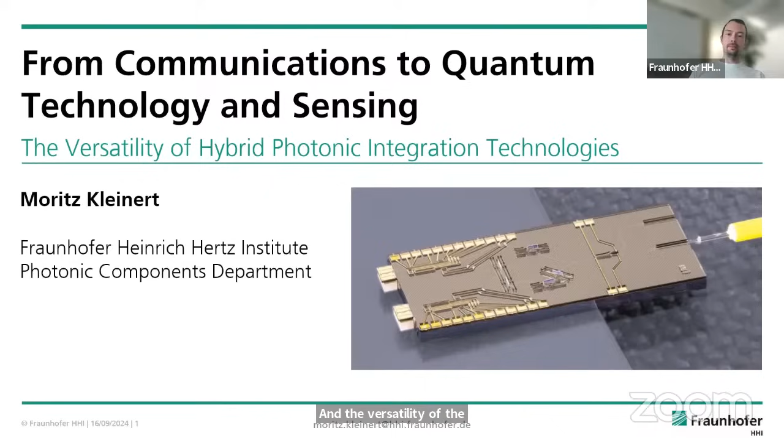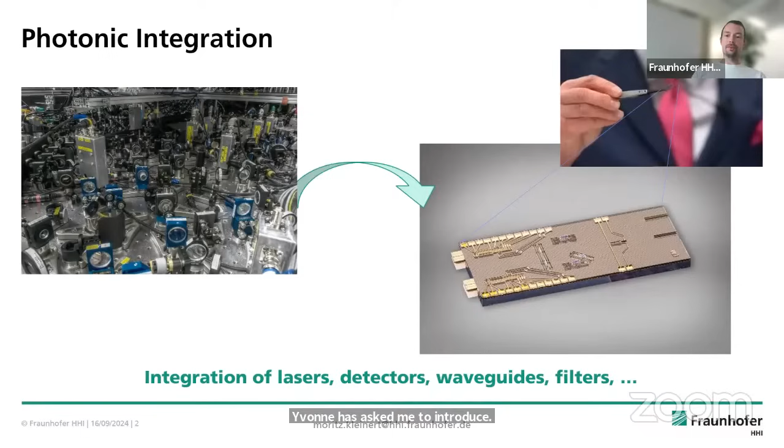Thank you very much for the kind introduction. Pleasure to be here with you today to talk a bit about our activities in hybrid photonic integration and the versatility of hybrid photonic integration technologies for various applications. As I'm the first speaker of today, Yvonne has asked me to introduce some aspects of photonic integration, hybrid photonic integration, to get everybody here in the workshop up to speed on what we are talking about. That's why I just added two slides to my talk today.

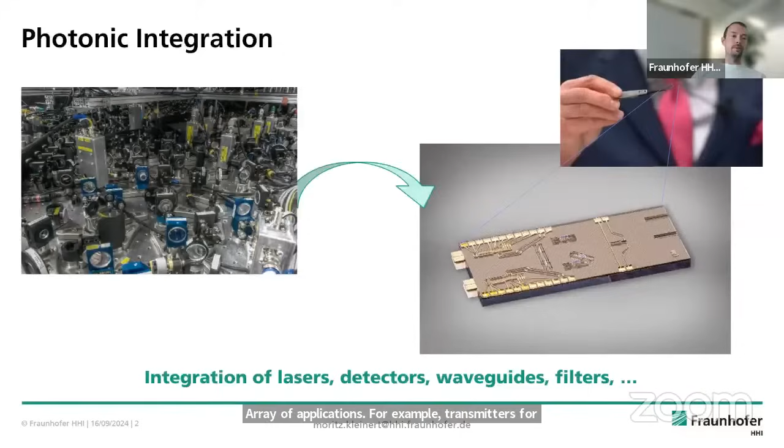I'm sure everyone is aware that in photonic integration, we want to integrate lots of optical functionalities from bulk optics into miniaturized chips. For example, lasers, detectors, waveguides, filters, in order to provide multi-purpose photonic integration platforms that can cater for a broad array of applications. For example, transmitters for communications, readout units for sensors, photon sources for quantum technologies, and the like.

There are several integration techniques that are being employed. One, of course, is monolithic integration, where the actives and the waveguides are on the same die. Everything has to be fabricated in a semiconductor material system, mostly indium phosphide, because it has a band gap that is suitable for near-infrared light emission and detection. One great advantage is that once you have fabricated your chip, you have your optical subassembly, so you do not need to do any assembly at this stage, just some module packaging, fiber coupling, that's it.

However, you're intrinsically limited by the properties of the material. For example, if you want to go to shorter wavelengths, say to fabricate a laser that emits in the visible, a tunable laser, then this material would be out of question. So if you want to go to other wavelength regions using a monolithic integration approach, you have to do all the development all over again.

And the second thing you need to take into account in monolithic integration is that even though you might be able to fabricate, for example, lasers, detectors, modulators, and waveguides on a single chip, there usually are some trade-offs in the manufacturing between all these different components. So usually the specifications you get from these elements on a monolithically integrated circuit are not as high as you would get from components fabricated on dedicated wafer runs - for example, dedicated lasers, dedicated modulators, dedicated detectors.

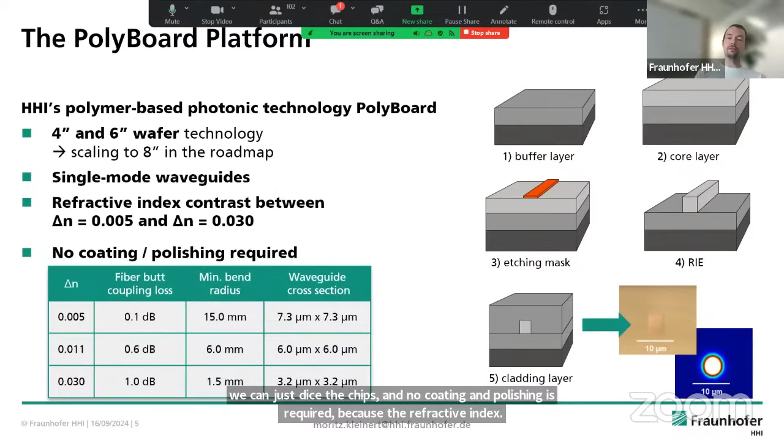A quick overview of the waveguiding layer: it's based on polymer materials that are commercially available, fabricated on 4-inch and 6-inch wafer scale, with scaling to 8-inch on the roadmap. We use single mode waveguides with rather low refractive index contrast, and we can just dice the chips—no coating and polishing is required because the refractive index of the waveguides is quite close to that of standard single mode fibers.

Here's one example of hybrid integrated functionality on these chips: a tunable laser, where we have an indium phosphide element that is HR coated on the backside and anti-reflective coated on the coupling interface, butt coupled to a polymer-based chip with a waveguide where we have an inscribed Bragg grating. This Bragg grating acts as the second mirror for the laser cavity, and it's tunable by means of thermo-optical tuning.

In this way, we were able to realize tunable C-band lasers, but the same approach can be used for shorter wavelength—this is one of the beauties of the hybrid integration concept. We leave everything as is, adapt the parameters a bit, exchange the gain chip, and in this way realize tunable lasers for 1064 nanometers and 785 nanometers using other gain elements. These lasers are building blocks used to fabricate more complex photonic integrated circuits, for sensing, communications, and quantum technologies.

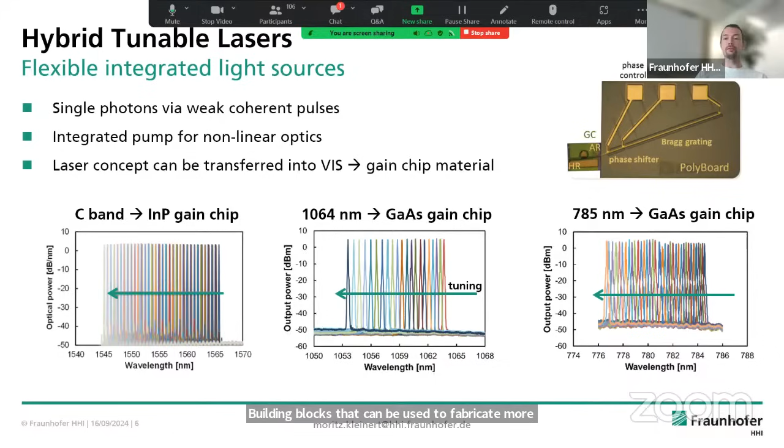One other functionality I briefly want to introduce is the use of thin film elements. Despite having optical filtering functionality that is waveguide integrated, as usual in photonic integration, we also have the possibility to use these thin film elements—basically very thin dielectric layer stacks, as known from classical optics, where you have coated lenses, dichroic mirrors, and the like.

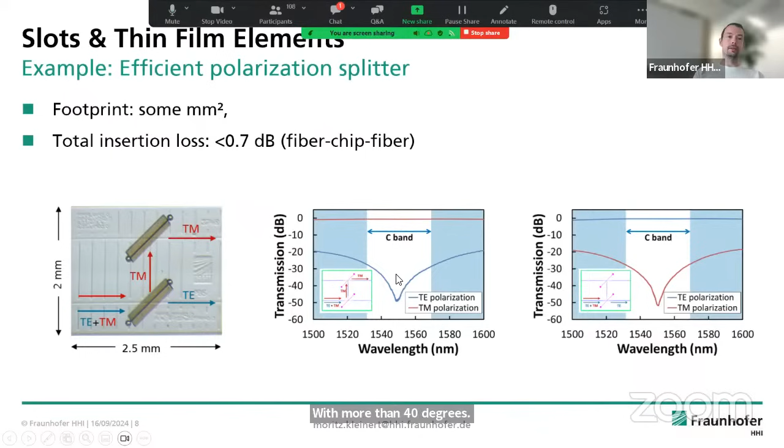In this way, we're able to transfer efficient filter characteristics from free space into integrated optics on a small footprint and in a temperature-insensitive manner. Here's one example: a polarization beam splitter that is quite effective with more than 40 dB of polarization extinction ratio and low insertion loss of below 0.7 dB from fiber to fiber.

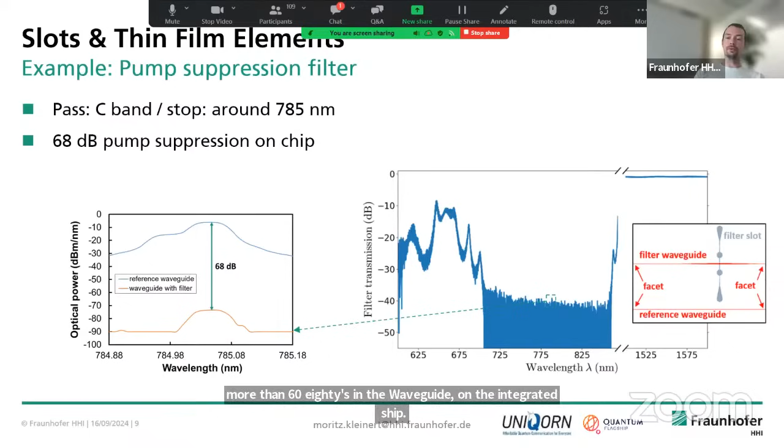Here's one example from quantum technologies, where we have a filter that suppresses the pump light by more than 68 dB in the waveguide on the integrated chip, which is very important for the generation of single photons and photon pairs.

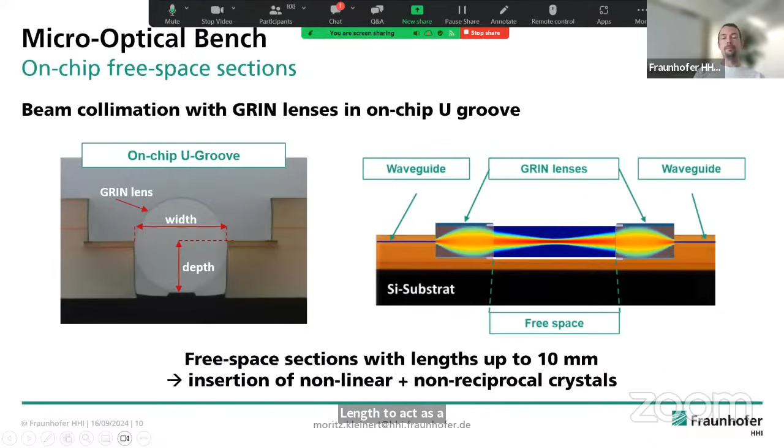A third building block we use extensively is our micro-optical elements, where we have graded index lenses—short pieces of graded index fiber polished to an exact length to act as collimating or focusing lenses—inserted into the PIC itself to realize free space sections on the chip, where we can insert basically whatever we like. For example, isolators, as here, with lower than 1 dB on-chip loss in forward transmission and more than 40 dB peak isolation.

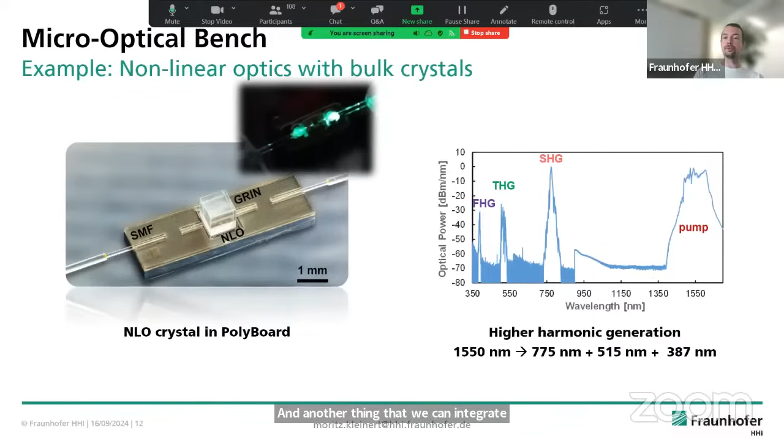Another thing we can integrate using this approach are periodically poled crystals for nonlinear optics. With this, I'll now move on to some examples that I want to show you today.

One example here from communications is a photonic engine for transceivers. This is part of the TERIPHIC EU project, where we have waveguide gratings as multiplexer and demultiplexer functional building blocks on the chip. These are used to couple arrays of externally modulated lasers and waveguide photodiodes to realize transceivers for next-generation data centers. One example with 8-channel photodetectors and 8-channel EML arrays demonstrates 800 gigabit per second capability. In the next step, we realized a 16-channel transceiver using the same building blocks developed for the smaller versions, using a bigger PolyBoard chip.

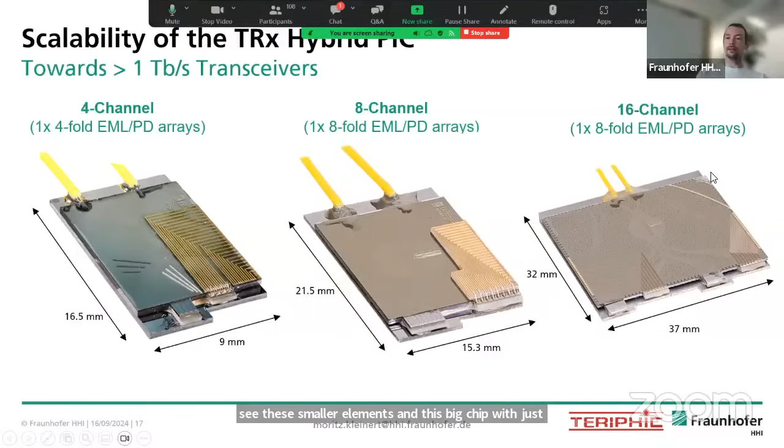This is also one great advantage of the hybrid photonic integration technique: you can have the active elements where you need them. Here you see small arrays of active elements and this big chip with just passive waveguides, which gives a great cost advantage compared to monolithic integration for these kinds of applications.

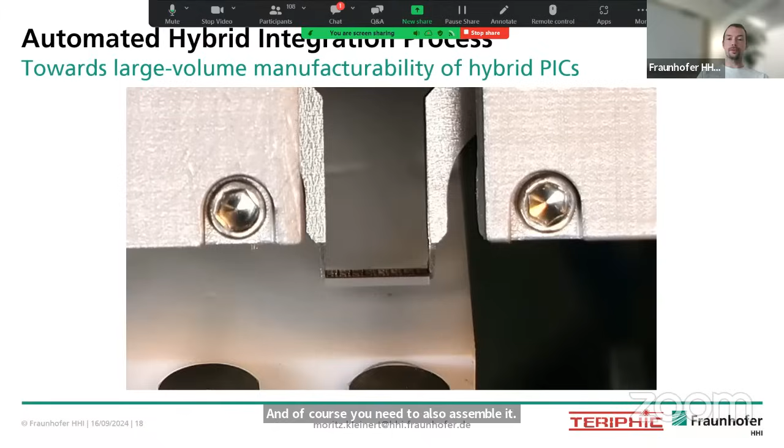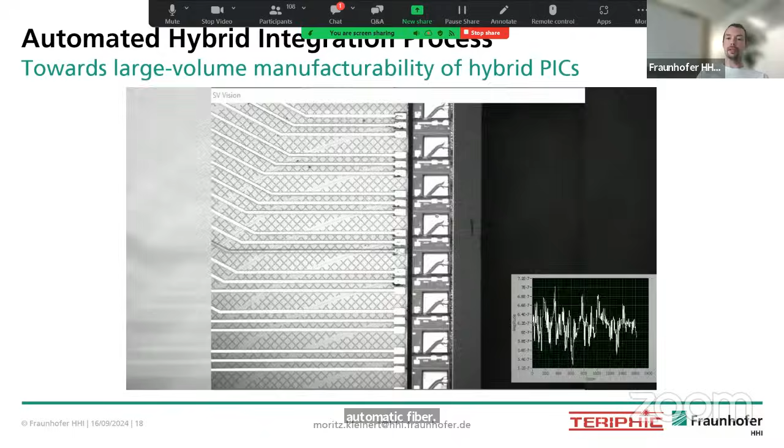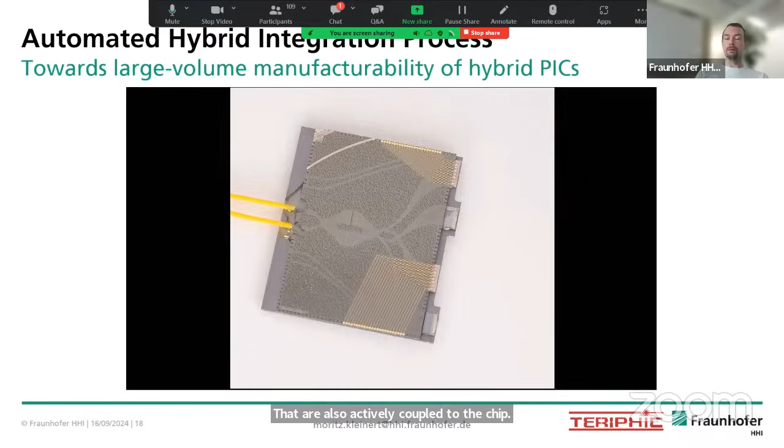And of course, you need to also assemble it. This is something we are automating together with partners, in this case Ficontec, where we have automatic contacting of the arrays, automatic fiber insertion into the chip, and active alignment of the EMLs. The same is done for the photodiode arrays, which are also actively coupled to the chip, cured, and then you have the optical subassembly. This is an important thing to always take into account in hybrid photonic integration.

Another example from a European project, TeraWay, for terahertz communications. This is a hybrid photonic integrated chip that generates terahertz radiation, for example for 6G networks. Here again we have tunable lasers that are introduced, an optical isolator on the chip — a quite unique functionality — a modulator PIC from indium phosphide, an antenna PIC from indium phosphide, and finally a TriPleX PIC from silicon nitride from LioniX.

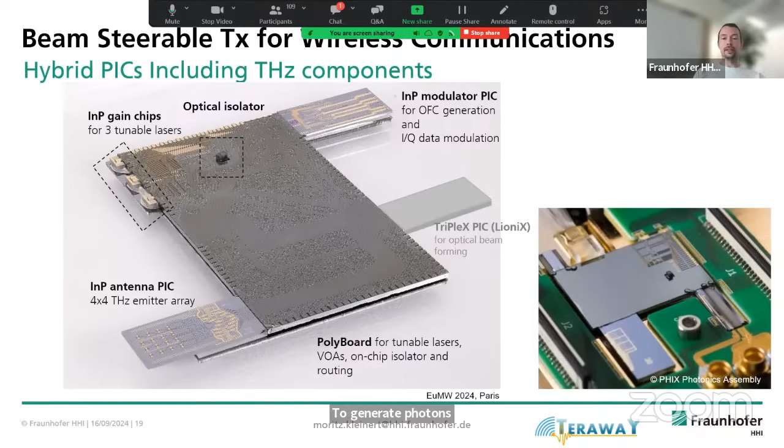Even though you see various indium phosphide PICs here, these are all optimized for their respective functionality. The modulators are optimized for modulation, the antennas and photodiodes are optimized for their functionality, and the gain chips are optimized to generate photons. So again, this underscores the advantage of hybrid photonic integration for these kinds of very complex integrations.

One last example here from quantum technologies. Here we make use of the micro-optical bench, where we insert a quite large periodically poled KTP crystal that generates photon pairs from an input of 775 nanometers, generating photon pairs at 1550 nanometers with orthogonal polarization that are split by the polarizing beam splitter introduced earlier.

The pump light is suppressed by the thin film element with more than 60 dB suppression on the chip. We can indeed demonstrate photon pair generation using this approach in a hybrid photonic integrated way, and these photon pairs are then available for more complex processing in the waveguide on photonic integrated circuits.

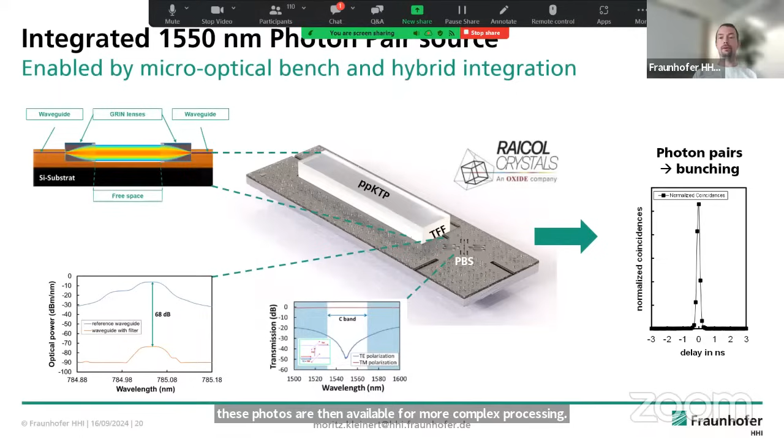With this, I'm already at the end of my talk, and I'm looking forward to your questions.

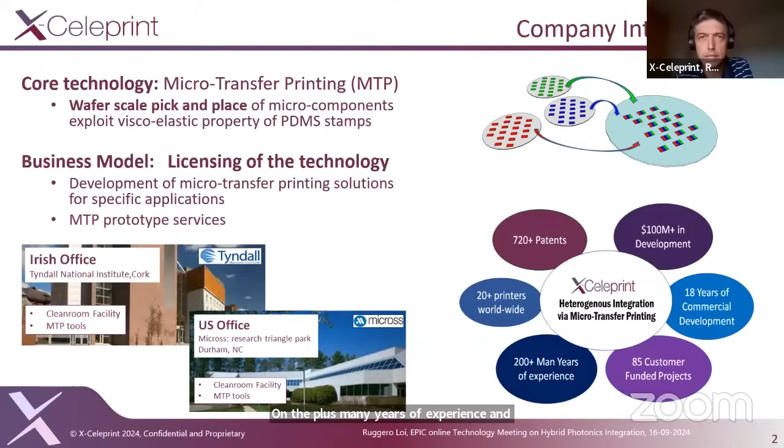In terms of numbers about X-Celeprint: we have 720 plus patents, 100 million plus in development, 18 years of commercial development, 85 customer funded projects, 200 plus man-years of experience, and 20 plus printers worldwide. This number is actually doubling in the last 6-12 months.

As we've had many requests, especially in Europe and from new RTOs and companies interested in developing new solutions on MTP, in terms of projects we are directly involved in a number of EU projects, for example Inspire, Ambrosia, Baman, and M-Engine, and we've been involved in a successfully closed project in the past. There is also a good number of projects that we support from the back but are not directly involved in. This shows how the ecosystem of partners working on MTP is able to work on their own on the technology and to develop new solutions.

This also shows how the maturity of the technology is increasing. We're also collaborating with pilot lines, and there are a number of EU pilot lines adopting MTP as a standard technology in their offer.

In particular, we recently have the Photonics Fab, which is actually building a small supply chain for indium phosphide integration on silicon nitride, and potentially on SOI, through microtransfer printing. There is also a number of projects with industry, usually about 20, between new projects coming in and projects closing.

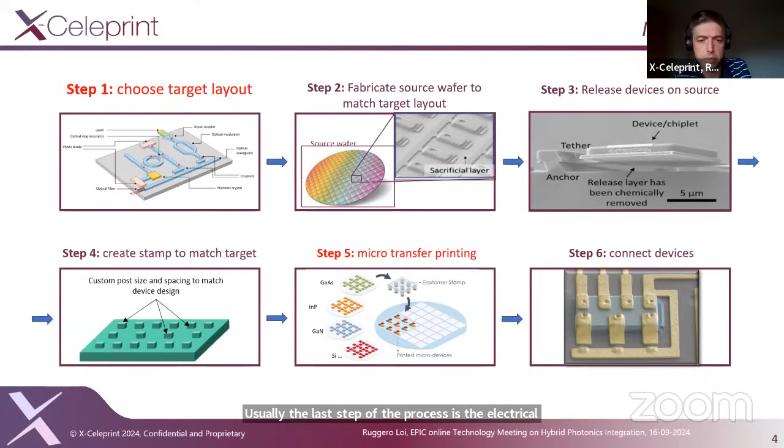In this way, we can mix and match different materials and device thicknesses on the same platform. In particular, we can integrate many components in parallel, increasing throughput and making the technology particularly suitable for high volume heterogeneous integration. Usually the last step of the process is the electrical interconnection, while optical interconnection is achieved by passive alignment through alignment marks and pattern recognition.

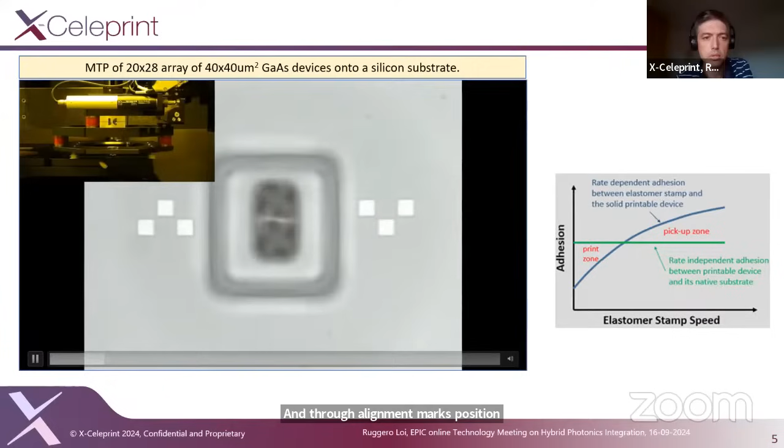So here I just wanted to give you a visual example of the technology. Here we have a source wafer where we pick up two coupons, part of a larger array. Through alignment marks positioned on the target and on the coupons, the pattern recognition calculates the correct alignment, and then we go down with this transparent stamp made of PDMS, and we're able to release the coupons on the target.

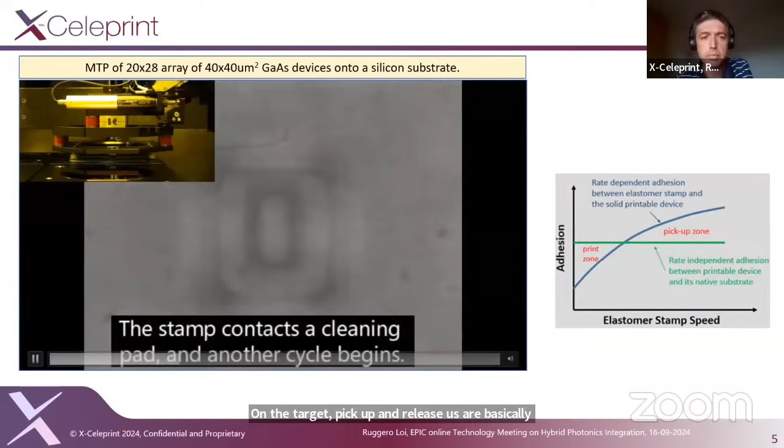Pick up and release are basically dependent on the speed of the stamp, that is, the speed at which the stamp is peeled off the substrate. At high speed, we're able to generate strong adhesion to the coupon and pick it up, and by peeling off the stamp slowly, we're able to release it onto the target substrate.

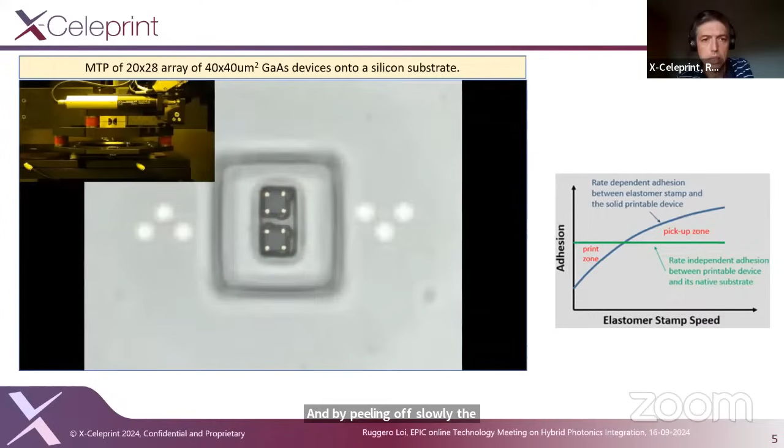So why use microtransfer printing for integrated photonics? What are the main features and benefits? For the starting wafer, we can accommodate, usually, a III-V material, which is pretty expensive. We can accommodate a highly dense array of components, increasing the source wafer exploitation. We can also fabricate the devices completely before transfer, which allows for known good die.

But it's also possible to integrate coupons of material and then post-process them on the target wafer. In terms of transfer, as I said, the technology allows parallel integration of many devices, and we can also mix and match different materials and stacks, giving the technology high throughput and flexibility.

In terms of printing, we work with passive alignment. We can reach below 0.5 micron, and we're already working on a strategy to reach 0.1 micron alignment, so 100 nanometers. We've already demonstrated that for a single post and small arrays, but it's still at R&D level. This technology is not used in production yet.

So in terms of microtransfer printing integration of photonic devices over substrate, we've done that for operational devices, or just material, single post or arrays. The types of substrate where we integrated these III-V or other components are silicon, silicon dioxide, glass, gallium arsenide, indium phosphide, also SOI, silicon nitride on insulator, as well as thin film lithium niobate.

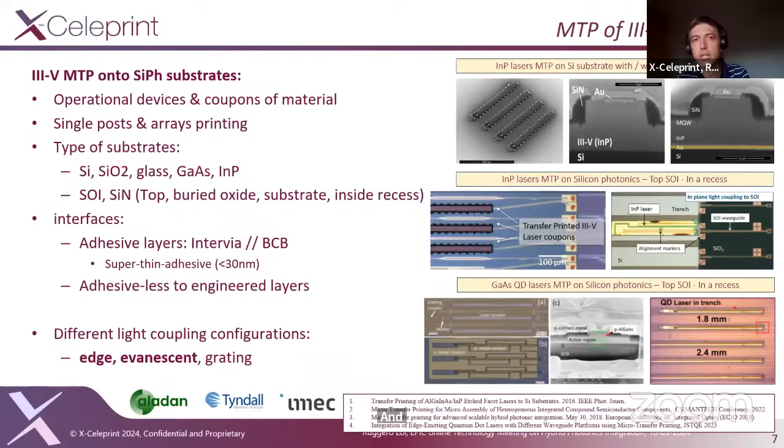So you can have an edge coupled laser on chip. I'll show you an example now. Here we have a laser, indium phosphide, integrated in a recess, butt coupled to a polymer waveguide, and then evanescent transfer the light to an SOI. Here you can see the laser light up and the light coming out of the SOI waveguide at the other end.

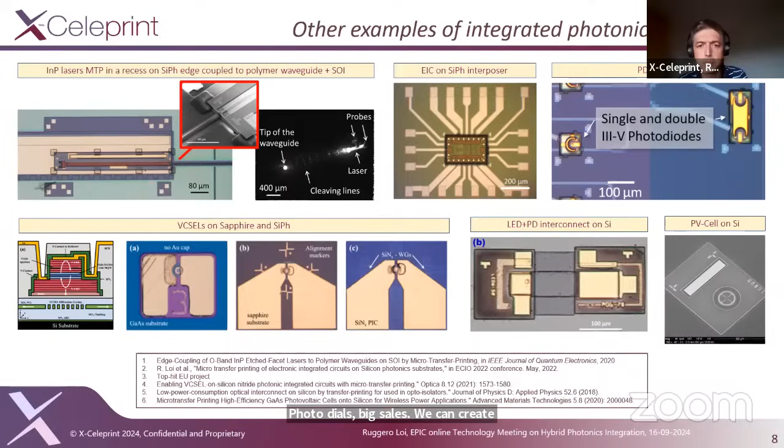We also show that we can integrate electronic integrated circuits, photodiodes, PV cells. We can create interconnects with LEDs, PDs, and polymer waveguides. We integrated PV cells.

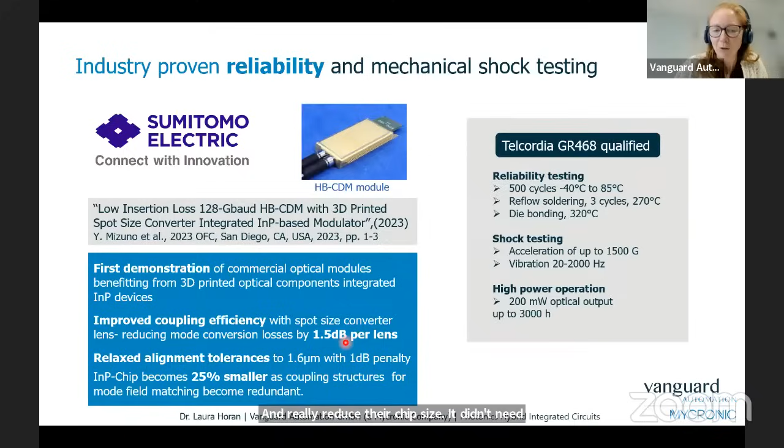And where Sumitomo saw the benefit here is to improve coupling efficiency, where they're able to reduce their losses by 1.5 dB per lens, pretty significant. Also relax their alignment tolerances up to 1.6 microns, and really reduce their chip size. They didn't need the spot size converters anymore on chip. They could use the 3D printed lenses for this and make their chips 25% smaller.

So we have a path to implement photonic integration with 3D lithography for customers and partners. And we do this slowly to really implement the technology into industry. So the first step, we recommend that the industry keeps their standard production process steps and simply adds 3D printed elements with active alignment into their photonic products. And the idea here is to prove coupling and yields, but also to prove the components for all different testing and requirements that the customer might have.

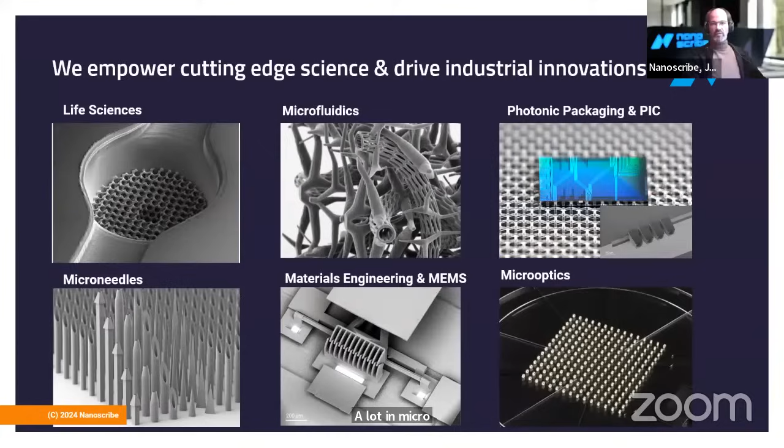A little bit of overview - beyond this, what we are doing here is we have these kinds of printing technologies used for life science, microfluidics, microneedles, material engineering. We see some MEMS devices here, a lot in micro optics, and what we talk about today is photonic packaging and photonic integrated circuits. I will explain this a little bit more, where we are placed there.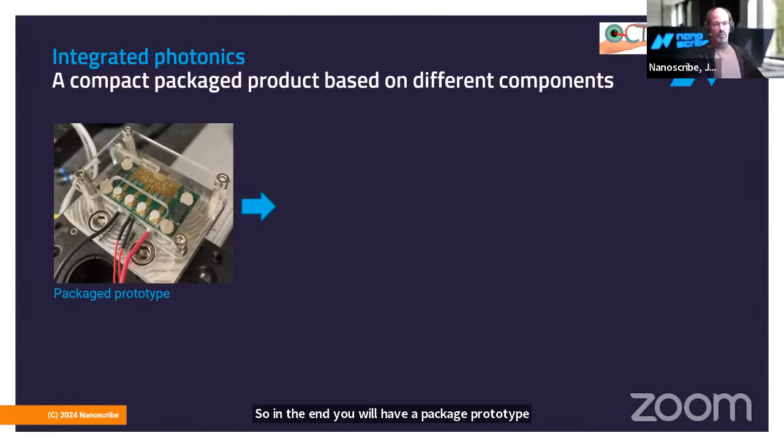Integrated photonics, as already explained by a couple of previous speakers, Moritz from HHI for example, is a product based on different components, and you need to mix and match different mode fields and diameters. In the end, you will have a packaged prototype, like we have here from the handheld OCT project, where you have the die - let me put on the laser pointer - where you have the PIC here on top, a fiber connector, and then we have printed here, as you can see on that side, some optical lenses in order to do free space coupling in this case.

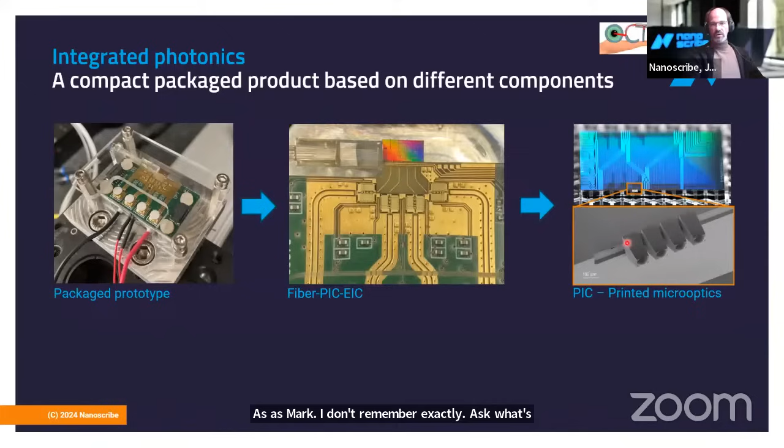So it's not fiber coupling, it's free space, as it is for OCT systems. We printed precisely aligned optical elements to the waveguide, with a detection precision of 100 to 200 nanometers, precisely aligned to the waveguide. This basically means we can print on any material - silicon nitride, silicon on insulator, any component, the PIC itself, a laser, a VCSEL, a photodiode, single mode, multi-mode, polymer, polarization maintaining fiber. It can be 2 seconds, but that depends on the optical design of the lens we print or the connection.

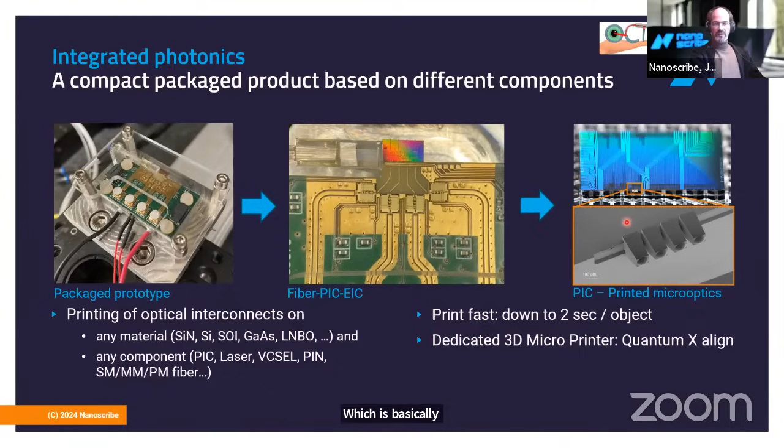For this, we have developed the micro 3D printer Quantum X align, which is basically a printing product where we also have resins and other accessories developed in-house by us. This is always a supporting patent for the portfolio.

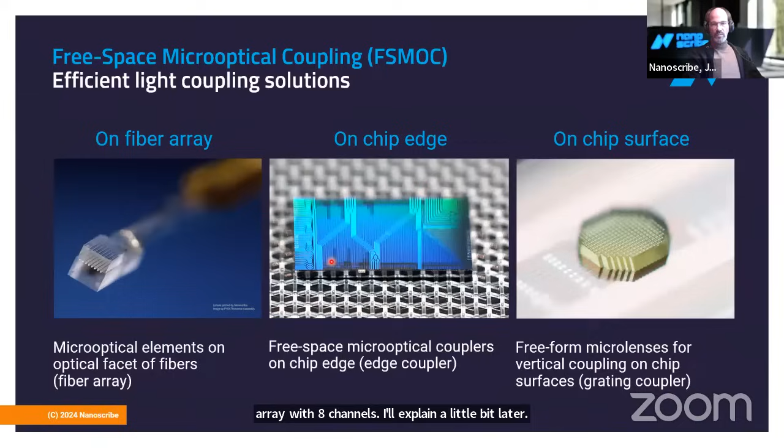So coming now to what this means for you: we can provide efficient light coupling solutions on fiber arrays. On the left side, you see a fiber array with 8 channels. This can be on the chip edge, as I've shown previously, or it can also be on the chip surface, replacing grating couplers.

So fiber arrays, what do we do there? We adapt the mode field diameter and the numerical aperture of the fiber array, which is 3 micron to 10 micron size, and we have to adapt, as Laura showed, to the small diameters on the waveguide, for example.

In this, we have a very easy software, Nanoprint X, where we define the lenses via a formula. You can see on the upper area, or you can just have the object you want to print, the micro lens or anything else, and load it into the software.

We mark the alignment feature you need. In this case, for fiber, we align to the core with less than 500 nanometer precision. You select process parameters - there's a ready-made set for every requirement in the system already available in the software.

Then you just print and develop. We use a honey-like resin - you just drop it on the fiber and then we can print. I'll not show this, but you're welcome to contact me and we can set up a demo, and I can show you online or on site in Karlsruhe if you want to.

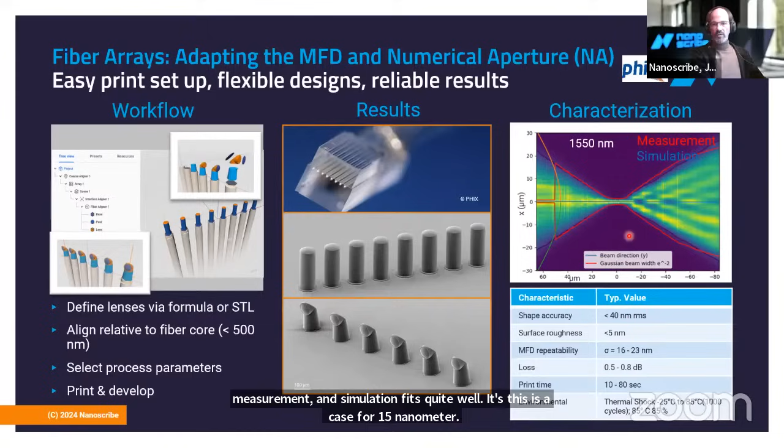As usual, we also have proof for environmental conditions, thermal shock, or humidity testing. That's all standard. Some images now to show the flexibility.

So here you can see on fiber printing, periscopes. This can be multiple lenses, a lens set here, or the taper for the butt coupling, things like that. Periscope array - this is a design by Printoptix.

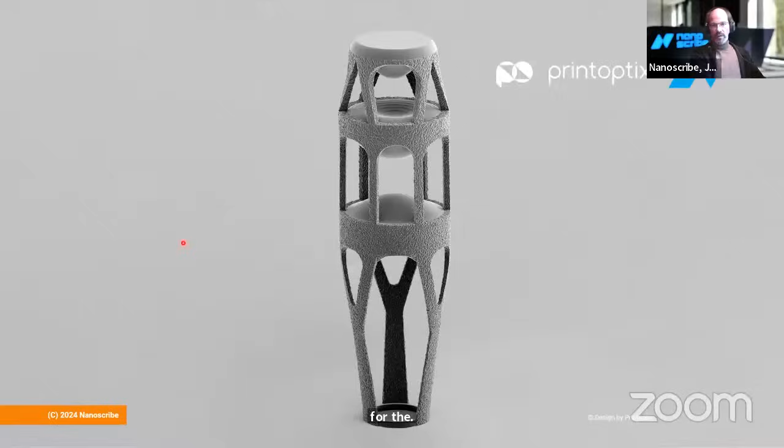We don't only print on normal fiber arrays, but we can also print on endoscopes or multi-core fiber bundles, anything you can imagine. And this is a multiple imaging lens.

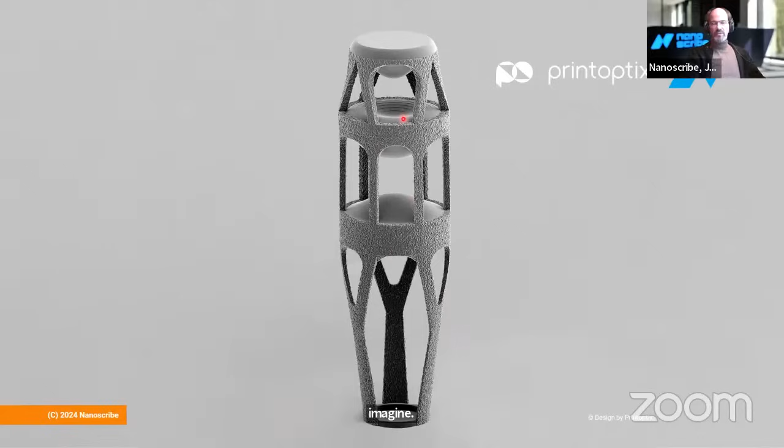So it's a little bit different than beam shaping. This is really imaging, giving an image back. So the quality of the resin is highly important.

You can see also that we can nicely shape even the surfaces on the side to have some kind of structured surface to avoid stray light, with our proprietary processes.

An image of coupling of lenses - you can see how nicely they are aligned. That was an in-house result print test.

On the edge of a chip, what we do basically is shaping the beam from elliptical to round, to couple to a fiber, or maybe to another PIC.

So again, in the software, you define the lenses, again with the formula or STL. In this case, you align relative to marker, so down to 100 nanometer precision is possible, depending on the design and on the printing speed also.

And then you also need to align to the edge, and make sure that you can print precisely at the edge to avoid some shadowing effects. Then standard process parameters: print and develop.

In the middle, you can see some results. These lenses I have shown already previously. And then here are some multiple lenses, a few minutes of print time for these lenses.

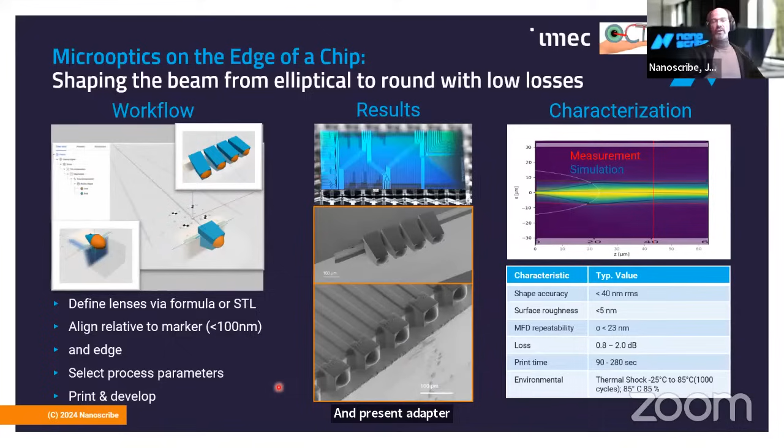Print time here is a little bit higher, so it's 90 to 280 seconds. It can be more - it really depends on your optical interface, and there we need to discuss. If you want to have on the chip basically a 1 micron, 2 micron, 3 micron mode field diameter, we then print the lenses adapted to this with our system, or rather our partners do this for you.

This is again from handheld OCT, an image of the chip. This is a setup where we have printed lenses on both sides on an EPIC chip. You can see a little bit here on the red lights, the lenses on the chip. And then you have a fiber array in front, and we achieve very low coupling losses here.

Also, what we want to stress is it's not only on the edge and on fiber, it's on surfaces of chips also where we can couple or print elements. So the classical thing is the one here in the middle, basically a grating array, where we printed 308 lenses for a partner. That was a project together with PHIX.

Another thing you can see in the software setup and the SEM here is a broadband coupler, which is together with Pixel Photonics, a customer partner of ours, where we can print a large array of these kinds of couplers on wafers directly.

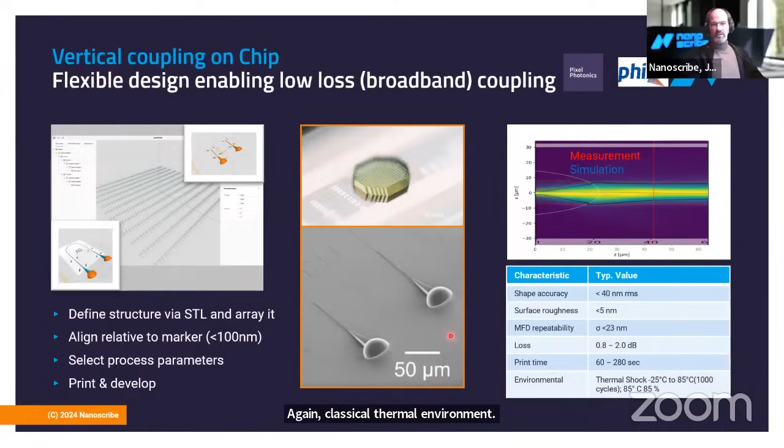Again, classical thermal environment conditions are available. Print time 60 to 280 seconds, pretty fast and easy to be set up.

Here are some more detailed images of it. This was even packaged, for prototyping for a customer. Very fast setup to test different designs. We went from 100 lenses to 300 lenses in less than a year with different design shapes.

Summarizing, basically what we provide with our system, we are a system manufacturer. The system can do any kind of 3D printed free space micro-optics with our proprietary printing technology, 2GL. It can do scalable manufacturing of lens fiber arrays.

Fast prototyping, really, I think that's a very important thing to start new technology, new developments in PIC. Another thing which was mentioned before a little bit in the discussion, we also do masters with this technology for nil, so you can imagine something combined of prototyping and nano imprint for mass production.

We have done different substrates. This is a silicon on insulator example from VTT. Other optics, as I mentioned, imaging optics on wafer level or directly on endoscopes or in different ways are possible.

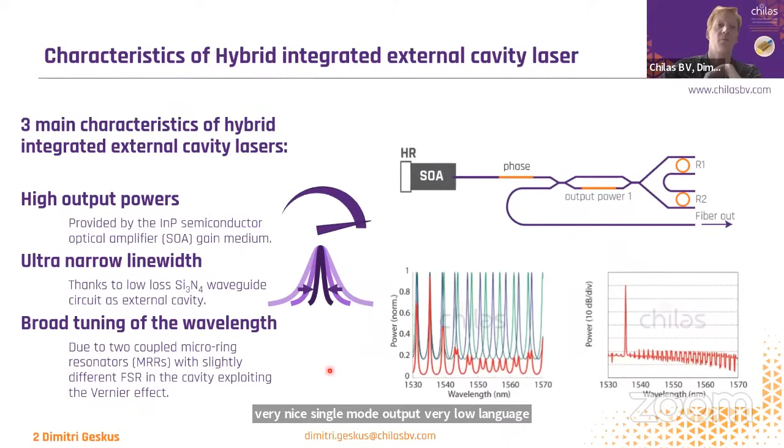So several products there. Right, it's not doing what I'm doing. There it goes. So within the 1500 C-band,

in that range, we've got a fixed wavelength laser, tunable to any wavelength in the C-band with accuracy of 10 picometer. And that gives us good output power and low line width.

We've got a new product, which I will show a little bit more over here and also in the future, and that's the swept source, where we stitch all the wavelengths together into a swept source. We've got a 100 nanometer tunable laser, which can be set to any wavelength within the specified range, exploiting really the wings of the gain spectrum, as you see over there. It's nice and compact, fits into an ordinary 14-pin butterfly.

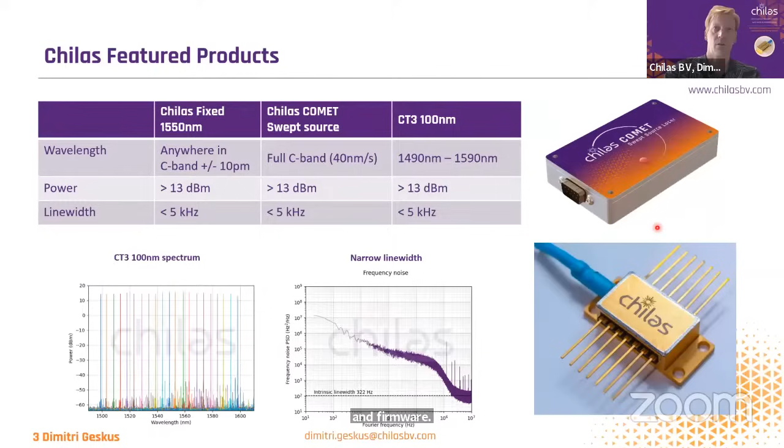And for the swept source application, we have developed a piece of electronics and firmware to put it into a single module. There, the thing is soldered hard in there, and that's it. But what can you do with a tunable laser? Well, you can do many things with a tunable laser. Can this ribbon be removed? I think not. Ah, there it goes. Excellent.

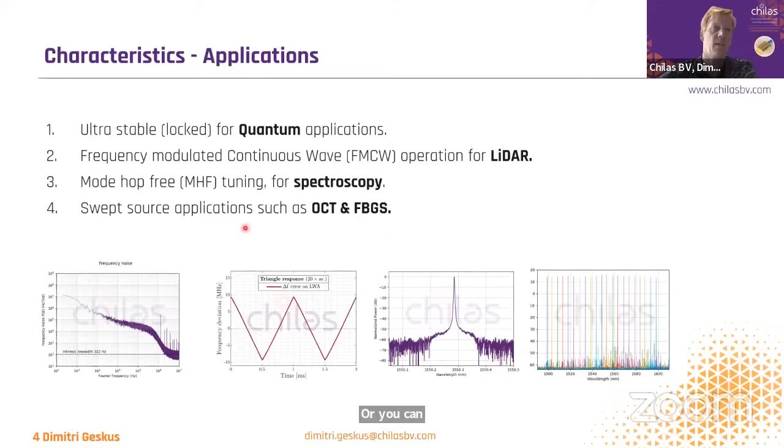One of the things you can do with this laser, you can make it very stable, locked on one wavelength, or you can do some FMCW for LiDAR applications. You have a small jiggle on the frequency, or you can mode-hop-free tune the laser for spectroscopy and other applications, or you sweep all over the gain bandwidth available for OCT and fiber bragg-grating sensors.

So here you see a little bit of the graph. Fixed wavelength, very stable, wiggle around, FMCW up to 1 gigahertz, 2 gigahertz of modulation depth, swept source for very wide range applications.

Here we present the outcome of the laser when it's free running. Free running means it has a stability of around 1 megahertz. So if you set it to a wavelength, it will stay at that wavelength with a jitter, a wiggle around, that is typically thermally induced of about 1.2 megahertz.

And if you lock it, then you get down to the kilohertz regime. You see nicely that for the low frequencies, the phase noise is reduced significantly. And you can also see that when you lock it to an acetylene cell, it stays there for a long, long time.

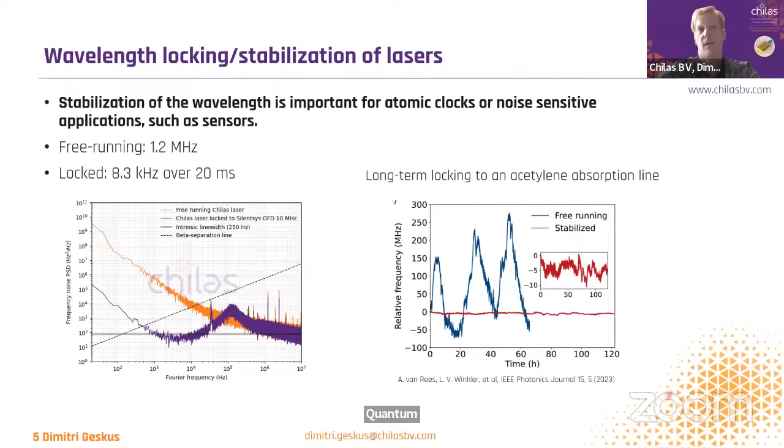This is very interesting for quantum applications, atomic clocks, and other applications where you need ultra stable light for long-term stability.

There are several cavities in this laser. There are two ring resonators, and there's also a cavity for the overall length of the laser cavity. And you can tune to any wavelength within the gain bandwidth.

Here we have a demonstration of one free spectral range of the cavity, which is stitched together, and we very smoothly tune all the heater elements. It's heater-based tuning, all together, to have a very smooth moving of the emitted wavelengths.

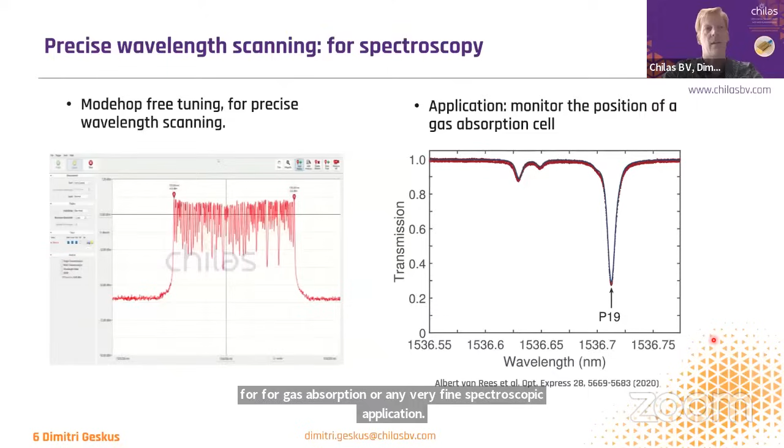This is excellent for gas absorption or any very fine spectroscopic application. We embraced this method, and we stitched all the modes of the cavity together, and I think we'll move to the next phase.

The next phase of hybrid integrated lasers is making a swept source. Here on the left bottom curve, you see the wavelength on the horizontal scale, and on the vertical scale, you see the output power.

It seems a little bit jittery because this has been stitched from a few hundred free spectral ranges of sweeping all together, but there's some control there, and you see a little bit of jitter on the output power. But it scans the full 40 nanometers within 1 second.

So actually every second you sweep through all these wavelengths with very, very high resolution. The wavelength grid is only 4 picometers, so you go from 4 picometer steps all the way over 40 nanometers. And it's very accurate and very reproducible, from sweep to sweep. This pattern is always there.

To demonstrate that we really hit all the wavelengths—because we get a lot of questions about whether we hit all the wavelengths, yes, we do—we made this very simple setup.

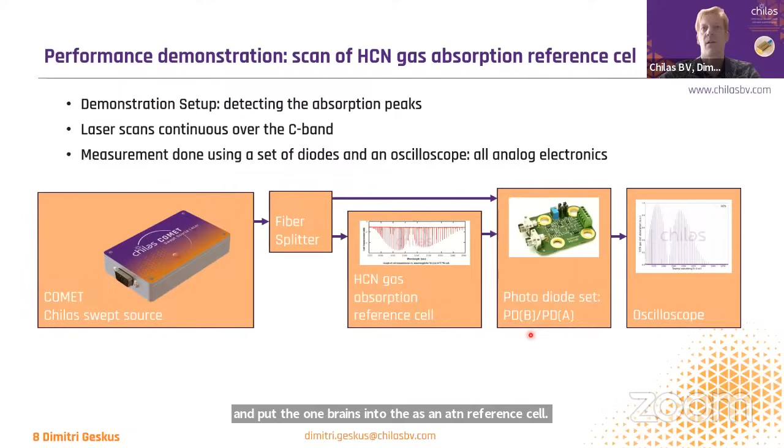We took a fiber splitter and put one branch into an HCN reference cell, which has some absorption peaks. We put it onto a photodiode, and then we display it on an oscilloscope.

And there you see that you retrieve all the gas absorption lines in 1 second.

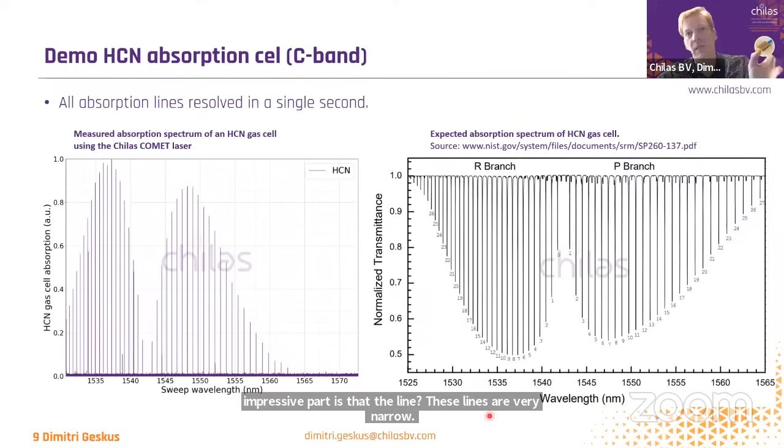Now, this might not seem very impressive, but the impressive part is that these lines are very, very narrow. And it is really hard for a laser to scan all of these lines and resolve all the absorption lines.

When we zoom in onto one single line, you see here the purple line is one of the measurements—remember, this passes the full C-band in 1 second. And then you see these 4 picometer step sizes here.

And the laser resolves the full absorption line of the predicted model.

In between the points, the shape is a little bit deformed, and that's because from point to point the wavelength sweep is not fully linear, due to the thermal-based tuning.

But we can improve that by putting more points in between and letting the laser scan more smoothly over that. At least this shows the laser linewidth itself is around 5 kilohertz, so you can imagine how fine the resolution is we can achieve.

Now, 40 nanometers per second is a fixed speed we have developed at the moment, and we can also scan over subsections of the wavelength range.

Instead of doing the full 40 nanometers, we can do, for example, 1.7 nanometers, and then you get a rep rate of 24 hertz, which is video rate. And we've got the next setup for that.

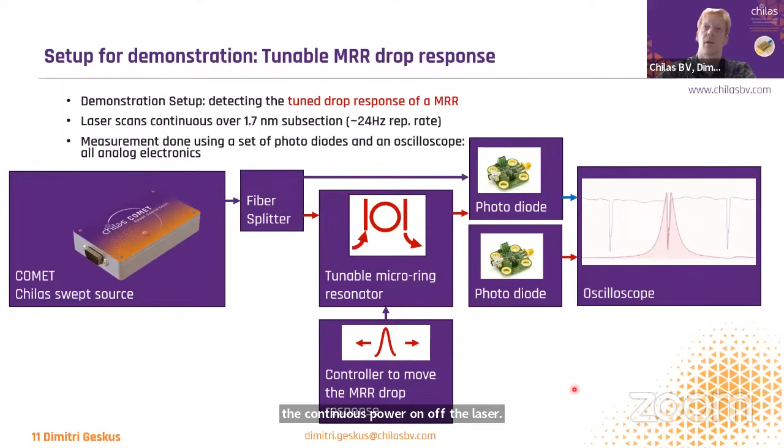On the blue side, on the back, you see the continuous power of the laser on the oscilloscope, and the red curve is the position of this drop response device under test. It gives a nice video.

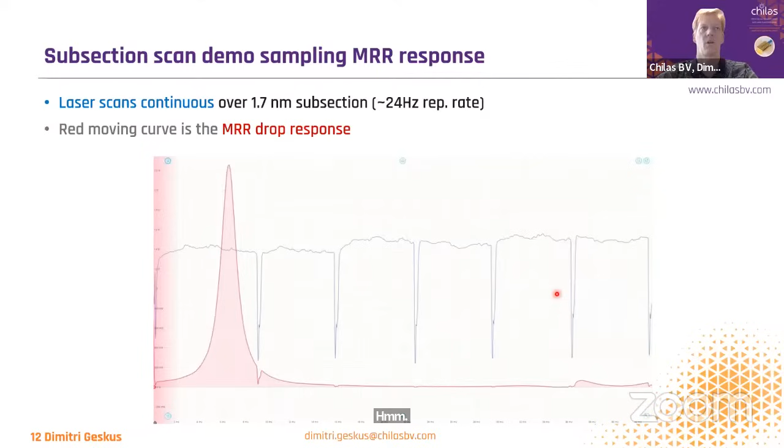That's a pity. Do I have to be patient? No, I'm not patient myself. I'll show it afterwards.

And next to the video, we also have a lot of other wavelengths. You basically take a silicon nitride chip and glue any other gain section to it. With that setup, we have several colors in the visible being developed: 680, 690, 707, and 780 nanometers, mainly for quantum applications. Output powers are around 1 milliwatt, and the tuning range is around 10 nanometers, all depending on the gain sections available.

Then we've got the 850 line, where we have some lasers available that tune about 25 nanometers. And then we have also a set which is tuning around 1700 nanometers, with plus minus 50 nanometers tuning range.

Now, briefly, we'll exit the presenter mode. Let's see if it works. Let's see if the video works like this. Now, I don't know if this... I hope I'm still sharing my screen there.

But I think this is one of the breakthroughs we are having, that we can really monitor some features of ring resonators at video rate. And we can customize the laser scan modes for all the customers we have on our hands. We're expanding our wavelength range and applying the lessons learned on this laser for the future as well.

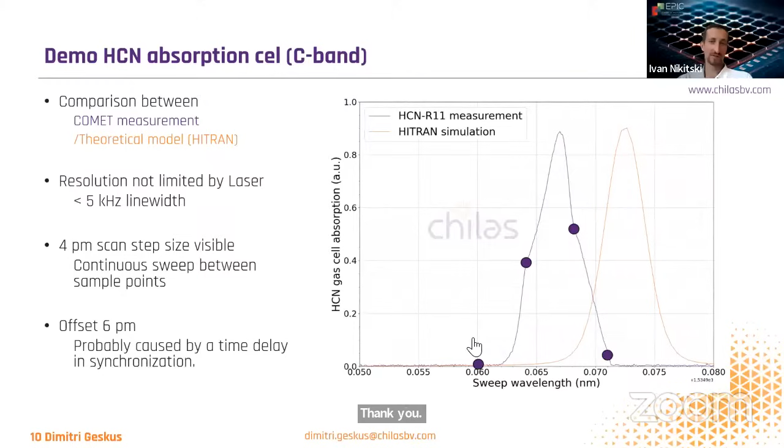The main applications at this moment, we see a lot of traction going on for fiber grating sensors. Any sensors, we've got some micro ring resonator sensors in the field. We also have a lot of traction on the very narrow linewidth, which is for some cases below 1 kilohertz, and there you get quantum key distribution, some traction there. So there's a wide range of applications. Last time I got called and they want to generate terahertz generation. Terahertz, whoa!

Everywhere you need a laser, a tunable laser or a fixed laser, this type of laser is of interest, I think. And again, we can pigtail them to your application very easily. There's a graphical user interface.

We've also got an API, so all command instructions are there to get the laser into your application. And if you want to go for volume, this is now assembled using machine assembly. It's fully automatically assembled. But in the future it will be flip chip assembled and even transfer printed, so we get our lasers into any system, replacing all the lasers in the world. So let's aim for that. Let's aim for that indeed.

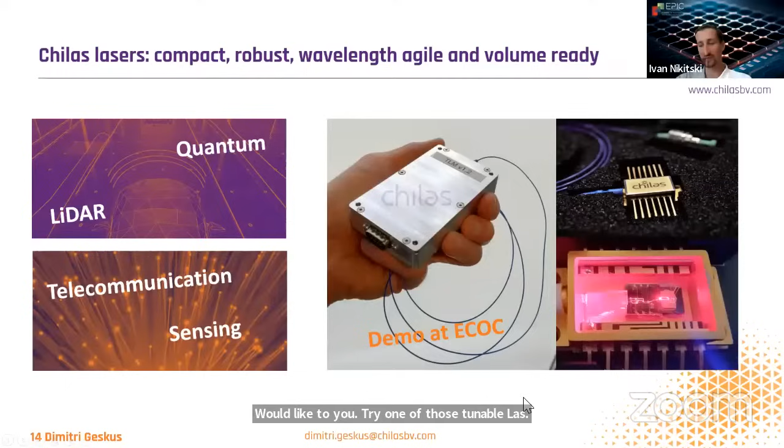Today we heard quite a lot about the technology already, about the platforms dedicated for it and the products. But we haven't heard anything about the main part, which is connecting all of them, the design. Within my presentation, I will teach a bit more on the perspective of how we can go through the platform to the design, and mainly how to account for this integration and interfacing part between different platforms.

within the single design, within the single final chip we want to get. So very briefly about the company. VPI Photonics is a software company providing software solutions for simulation, optimization, and design of optical circuits.

And not only that, but I will come to this in a second. We are also offering some design services. We are on the market for over 25 years already, with regional offices in Europe and North America, and a lot of global networking resellers all over the world.

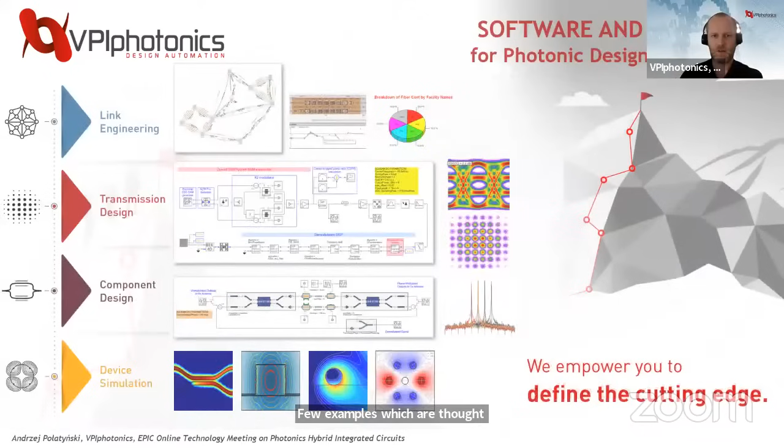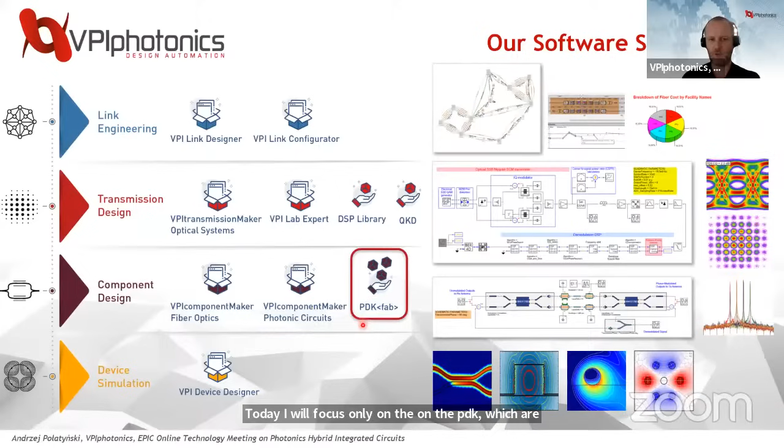So from our product perspective, I mentioned we are covering everything from the device to the system level. Today I will focus only on the PDK interface, which allows us mainly to link the foundry dedicated components to enable the PIC design with them and fabrication of the chip afterwards.

So very shortly about the PDK: in a standard approach, the foundry just provides some kind of description of their processes in the form of a PDK library, describing all necessary information, including the performance of the building blocks, layouts of them, but also a detailed description of the process, reflecting the technology steps in order to fabricate it.

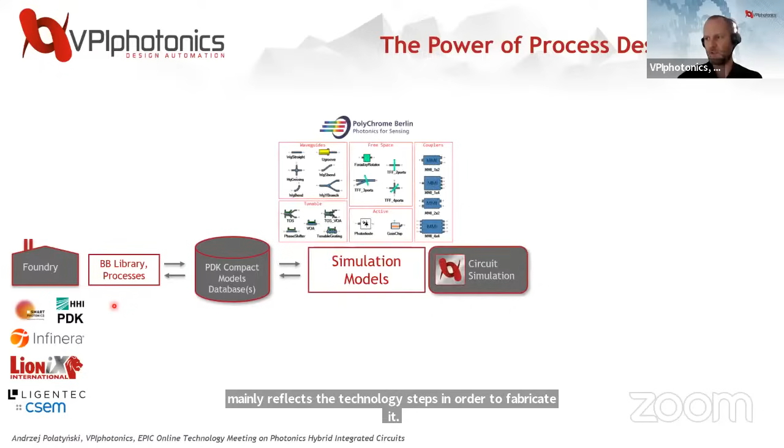Based on this, there are some PDK compact model databases created, and we create simulation models for it. These models mainly take information from either measurement at the fab or from simulations. And of course you want to bring this in a hopefully standardized format that will enable automatic creation of these generated simulation models. Then once you have the simulation models, you are of course building your circuit design, which you are interested in.

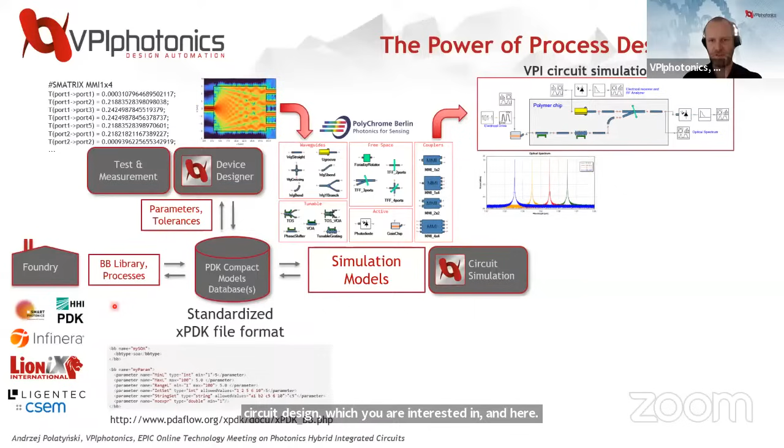Here I will come back to this example, but we see the reproduction of the widely tunable laser, which was shown by Moritz from HHI. But yes, as I mentioned, I will come back to this.

The idea is that mainly we can simulate the PIC itself, but we can also verify this PIC on the system level. We can co-simulate it with the electronics. And once we are happy with the design, we can extract the layout process with the layout design in order to prepare the GDS file, send it to the fab to get our assembled PIC.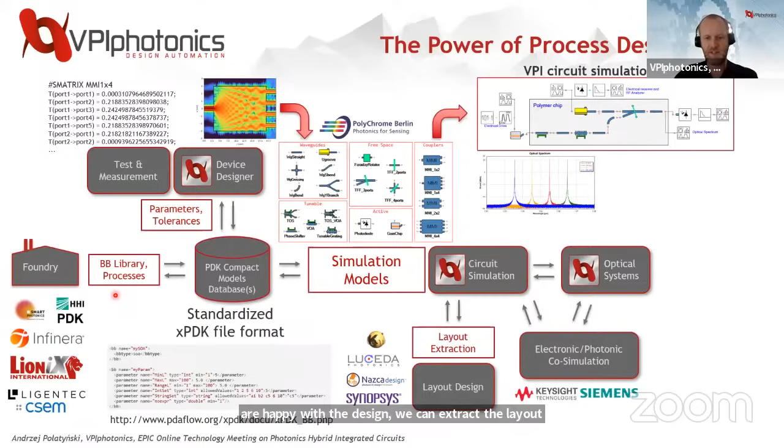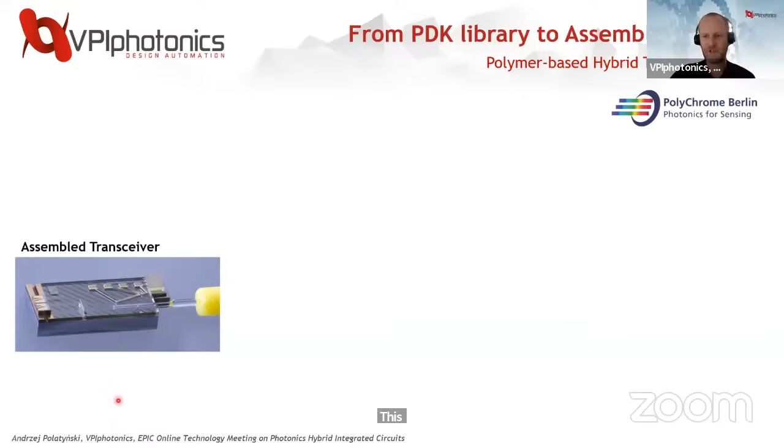So now I will talk briefly about the different approaches used between different platforms to enable this hybrid PIC design. I will start with the transceiver, which is a bit extended version of the HHI laser shown before.

We are interested in the final design, which includes some fiber components, including the coupled laser with photodiodes on chip. But we start just with the building blocks, so let's go through how we do it.

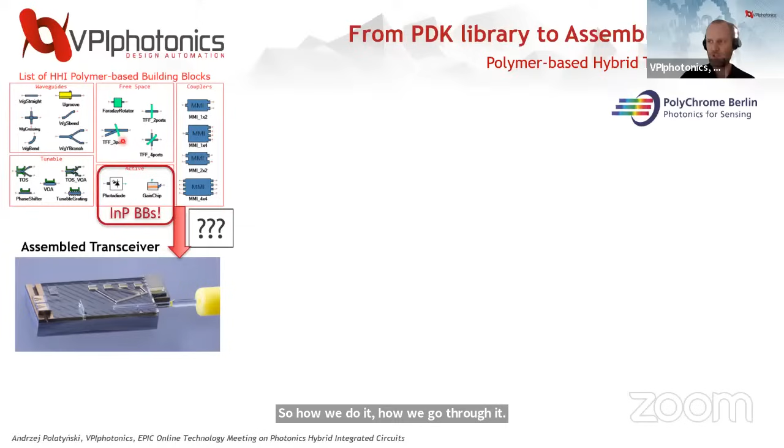One more thing to mention: within the PDK library for this polymer platform, we already have some indium phosphide components. That's one typical approach for how foundries can enable direct integration of platforms. You build your polymer chip, which will directly include additional gain sources, additional photodiodes, or modules enabling direct coupling to fibers.

Those components are already optimized for the fab and can be fabricated and assembled by the fab directly. This means that after your simulation, once you show the results you're expecting, you can directly export the layout to one of the desired layout tools and process with GDS generation.

Note that the GDS includes only the layers belonging to the polymer chip, but there are predefined spaces enabling direct integration of these components with different platform modules. If you provide such a design with additional information on how this needs to be coupled, HHI handles the assembly and provides the final chip, assembled with the polymer chip fabricated by them and the indium phosphide components created by their foundry.

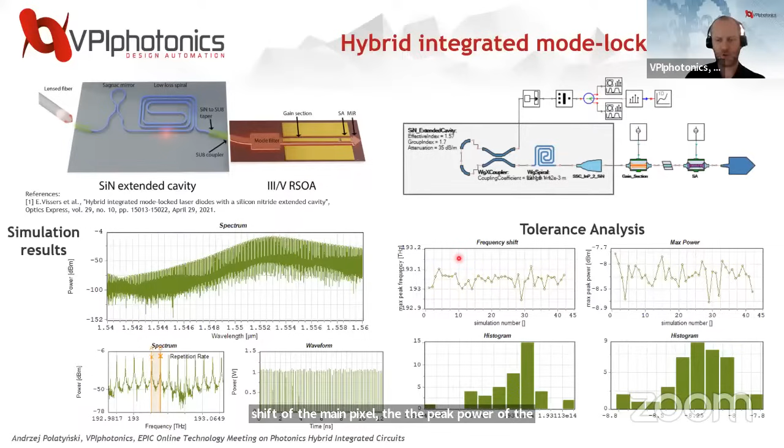In that case, I was using mainly the provided information from smart photonics on the tolerances, plus some additional Gaussian variations on given components, to investigate how the frequency shift of the main peak, the peak power of the whole spectrum, and also the maximum power of the spectrum will behave based on a given number of runs.

So to conclude with the standard approach which was shown often, what can you do for us? Firstly, you can use our tool to develop your own PDKs and share them with your customers in order to allow them to follow up with your designs. But also, we will be very happy to get feedback from you regarding your design needs and your PDK development, especially if you believe something should be added to the tool.

Where we can help you, mainly we are enabling various strategies for the hybrid PIC design, offering the workflow from devices to systems via circuits, and offering you the custom PDK framework, enabling you to develop your own components and interfaces to build the design and be able to fabricate those integrated platforms directly.

Just a short comment at the end, we are helping to accelerate this design together with the export to the layout, which we presented already several times before. And also we are offering personalized support to help develop these PDKs.

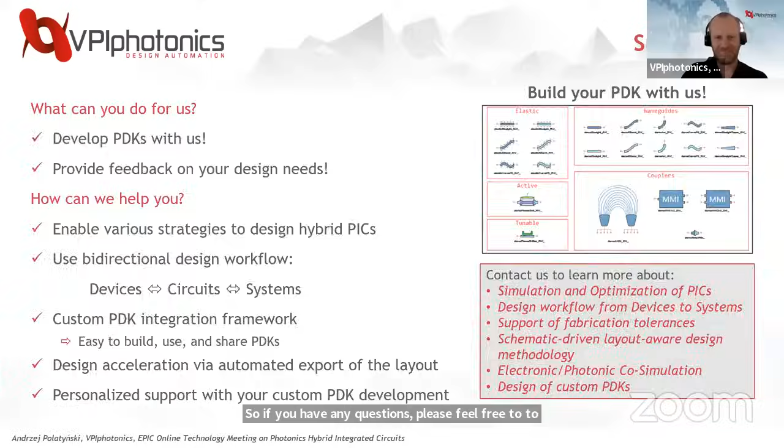Yeah, so I'm happy to talk to you either anytime now or at ECOC in person, so we can go into details there. Let's do that. Thanks. Okay, that's the spirit of the EPIC meeting. Okay good, thanks for your involvement and question, Dimitri.